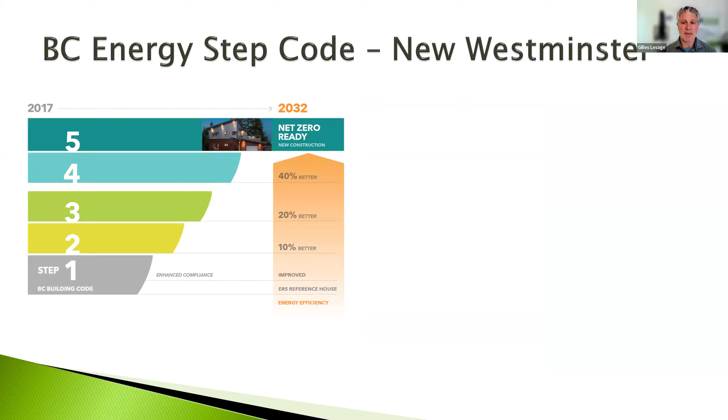So in regards to BC Energy Step Code and the upper steps, steps 4 and 5, that will be the focus of what we're talking about today. I'm sure all of you are very familiar with this already, seeing as New West is already at step 4 and step 5 with the varying levels of the carbon step code. That might be a bit of a newer concept too, but we were at EL1 for the longest time where it was just measure only, and now New West is voluntarily adopting higher levels of that, so step 5 with EL2 or step 4 with EL4.

And I understand that there's some talk about possible changes to step 5 and EL4 coming up possibly very soon.

So with that said, you're probably all very familiar with the basics of step code. I've got a few slides here to kind of talk about some of those things, but what I'd like to do is really look at some of the fundamentals of step code and how they affect and help us along to step 4 and step 5.

We also have the new carbon step code, with the idea that by 2030 we're at zero carbon performance or zero carbon ready, which would be EL4. So that too is something we'll discuss briefly. But a lot of this stuff, we have to understand that the energy advisor is basically the one figuring this out for you, to make your lives a little bit easier as part of your team. So we're really relying a lot on the energy advisors to come up with some of these numbers to show compliance.

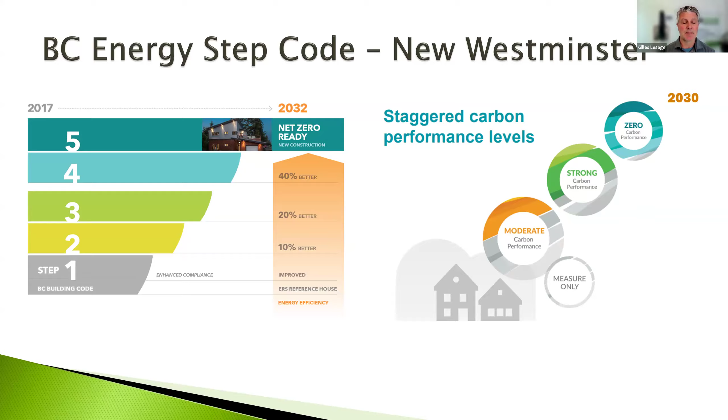So in regards to step code, we've got our basic metrics, I'm sure everyone is quite aware of. We've got the envelope targets, the mechanical targets, and the air tightness targets. And I'm talking just about the step code, not the carbon code at this point. We'll come back to that a little bit later.

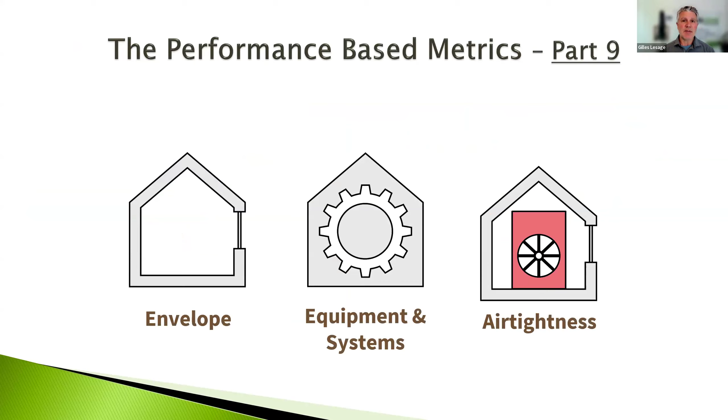We've got a few options here in BC. I don't know if some of you might be aware, but nationally they've got the tiered code, and it's very similar to our step code, but they don't use the TEDI or the MEUI as part of that. All they have is that percentage better than. So here in BC, we do have that extra kind of option for each, the mechanical and the envelope target.

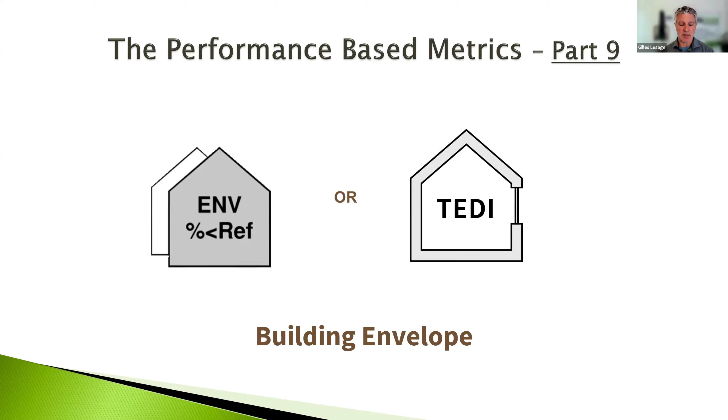So for envelope, we've got the percentage better than the base code reference house, if you will, and of course the TEDI, which is a performance-based metric according to the size of the home in regards to the heated floor area. And the TEDI, how it's calculated, is basically the energy that is needed to keep the home heated.

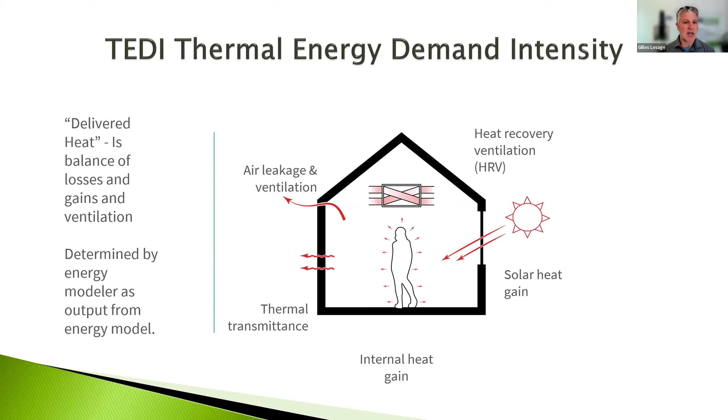Again, I won't spend too much time on some of these items here. And then they did make some adjustments fairly recently, as of May 1st of 2023, to allow for smaller homes to have a little bit of leeway, because we did find that there was a bit of challenges for smaller homes to achieve certain things. So there were some adjustments made.

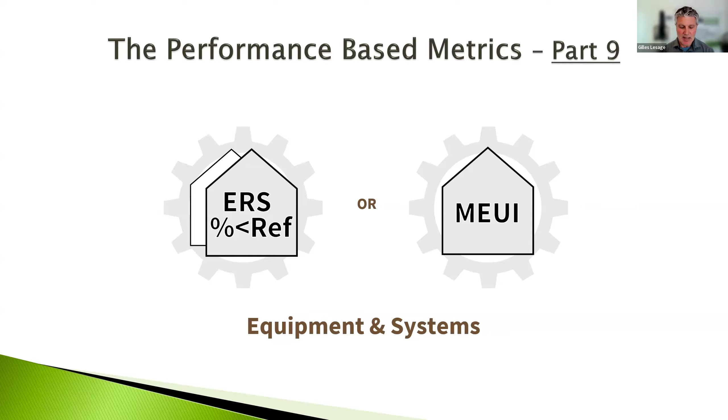All of this is in the tables, for your energy advisor, whoever, to manage and reference. Same thing with the mechanical target. We've got the percentage better than base reference house and/or the MEUI, which is that per square foot of heated floor space kind of metric. And again, it's either or for each of these.

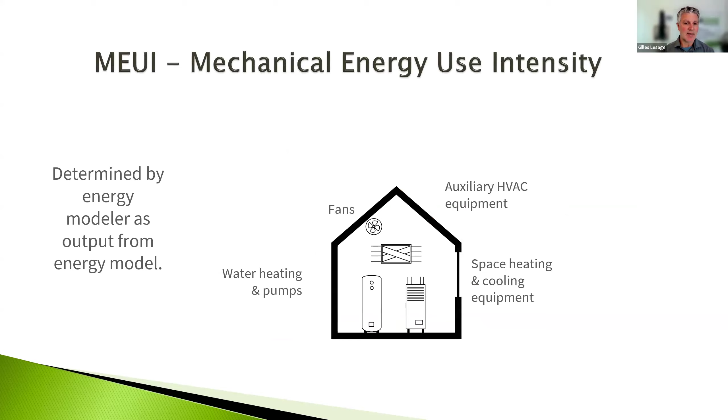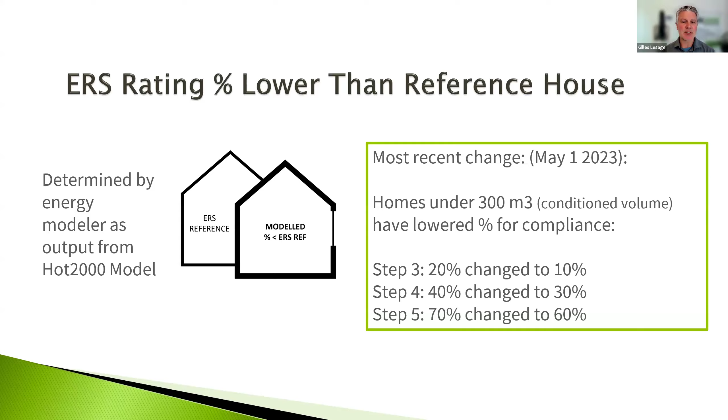And of course, the mechanical energy use intensity is, again, the energy needed to heat, cool, and ventilate your home. And that is compared or divided by the square footage of that heated floor area. Again, smaller homes were given a little bit of leeway here at the same time, because we are finding that the calculations didn't really favor smaller homes. So there were some adjustments made there.

Air tightness. This is obviously a huge factor. It's one of those metrics that is a pass or fail within our systems and our targets. It's becoming more and more prevalent, obviously, with step 4 and 5, because of the targets being more stringent for much tighter homes for those upper steps. So step 4 and 5 is 1.5 and 1.0 ACH. I'm sure you're all very well familiar with ACH and what that stands for.

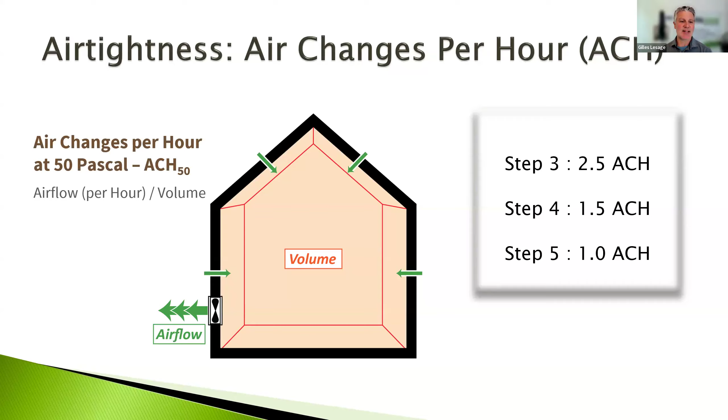The good thing is that one of the recent changes is that they did introduce equivalencies to the ACH, which were the normalized leakage area and the normalized leakage rates. And these are now published as part of that. So now we have ACH or NLA or NLR that we can use to meet these step code targets.

And why I say that's good news is that smaller homes and smaller volumes really did not translate well to ACH. And we were having trouble passing at some of the more normal targets, even for step 3 for laneway homes, for example. Vancouver had this in their VBBL for a long time, and it was like, why doesn't step code have this? So eventually it came through and became part of the changes as of May 1st of 2023.

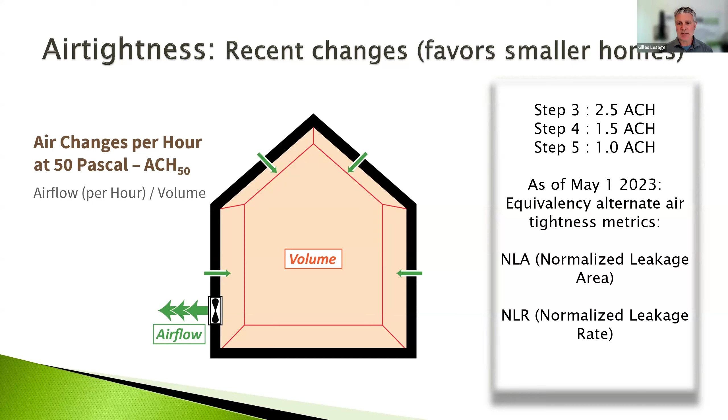So a few more options there, and of course everything is published. The NLA is basically, if you added up all the leakage of the entire home into one area, how large is that hole? Then it's divided by the surface area of the building, so it's normalized that way too. The same thing with the NLR, the leakage rate, which is the CFM or liters per second flowing at 50 Pascal divided by the surface area.

Again, all these things are for your energy advisor to test for and to gauge, and to use whatever metric works to reach these targets.

We will talk more about air tightness a little bit later on, but there are a few more design considerations first that we should look at when it comes to the TEDI, MEUI, and how that's calculated within the heated floor area, and some things that might help with that.

You may also be very well aware of this, but perhaps this might be a review for some of you. It could also be some new concepts that we're exploring here as well.

One of the larger things is the assemblies and fenestration performance, the shell of the building, and how that helps reach steps 4 and 5. Mechanical choice is obviously a huge part, and then air tightness again. So all equally as important to getting to that step 4 and 5.

I'm sure everyone here has the same kind of attitude: when we approach projects, we want to do what makes sense and apply the more feasible and practical ways of achieving step 4 and 5. So again, we have the luxury of having some of those choices.

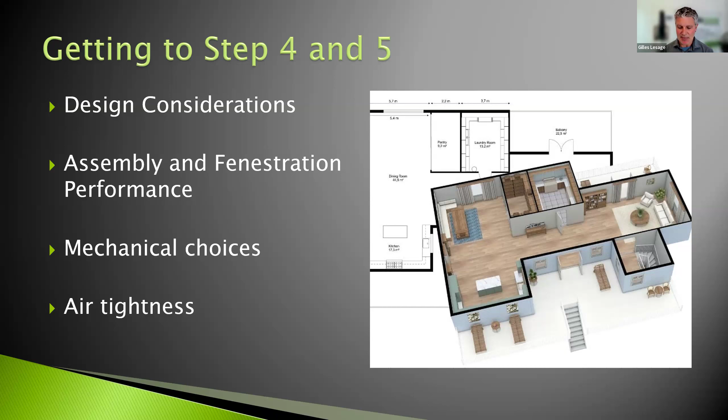So first, for design considerations, for the heated floor area - this is important for the TEDI and the MEUI because these targets are divided by the size of the home, the square footage or square meters, and that is from the heated floor area.

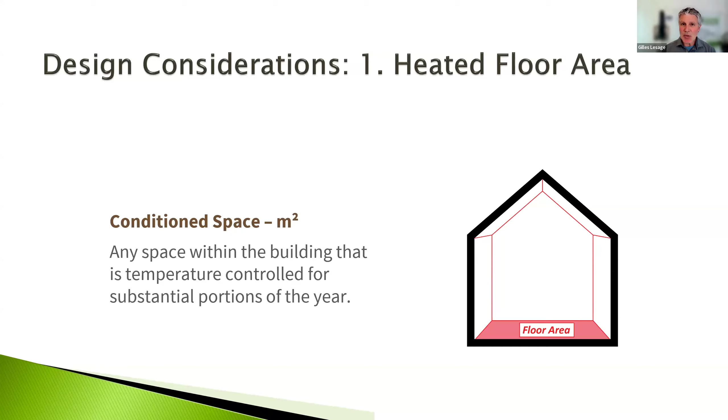So what that is exactly is any space within the building that is temperature controlled, a conditioned space, and it's also a usable part of the building, for lack of better words. It's the sum of the above grade floors and below grade floors that are at least 4 feet in height. That's what's included in the heated floor area.

Any kind of spaces like a mezzanine, for example, and open to below areas, these are not usable spaces. So typically the way you look at it is: can you walk on it, or can you walk comfortably in it? That's kind of the metaphor that I like to use.

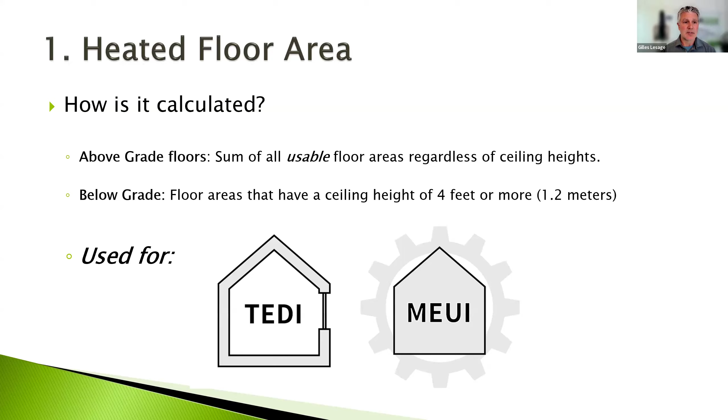It's used for the TEDI and the MEUI calculations only, not for the percentage-better-than calculations for those same targets. One thing that really affects the numbers are crawl spaces - we're looking for that 4-foot rule. Any kind of crawl space that is 4 feet or higher to the underside of the joist from the slab, that square foot or square meter area can be included in the calculations for the heated floor area.

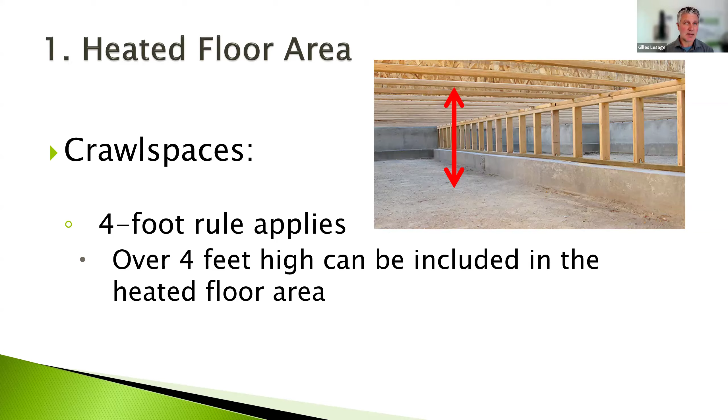So in essence, if you're looking at a 3.5-foot crawl space versus a 4-foot crawl space, that can make a big difference. Unfortunately it is a numbers game, and that does affect our calculations, but that's what we have. Just a 3-foot crawl space to 4-foot crawl space makes a huge difference in regards to calculating the TEDI and the MEUI.

And again, as mentioned, areas open to below are not included. So we're basically making calculations for TEDI and MEUI for an entire house, but we will not be able to use that floor area from that area. So that kind of hits our calculations a little bit.

So when it comes to design, I guess that's where I'm coming from with this. It would be great to keep some of this in mind. If you can, within the limitations of what we can do for design, if we have those options to avoid open areas to below as much as possible and to avoid 3-foot crawl spaces, that might help you in regards to the TEDI and MEUI calculations.

Number 2 in design considerations is windows. The amount of glass in a home really does affect things, I'm sure we're all aware of this. The amount of windows and where they're placed can have a huge effect on the project and how we're hitting our targets, both for percentage better than and the TEDI and MEUI.

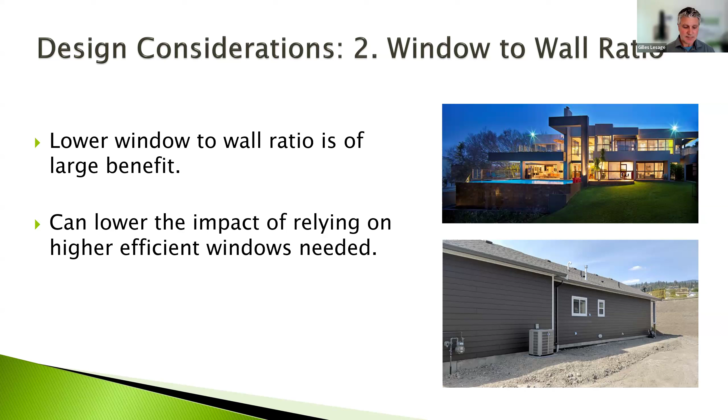When it comes to the window to wall ratio, we're always comparing to that base code minimum house, which we call the reference house. Within that reference house we'll always have a window to wall ratio between 17 and 22%. So if your proposed house, your project, the as-built or what have you, has a 15% window to wall ratio, you're at an advantage because it will compare that proposed house with a reference house of 17%. So the numbers are in your favor.

Again, if we have a house like in the top right here, where we might have a 35 to 45% window to wall ratio, and we've had lots of those here in the Okanagan, I can tell you, that house will be compared to a home with a 22% window to wall ratio. So it really will have to work a lot harder somewhere else to get there, or we have to go with really good window performance, and maybe wall performance, et cetera.

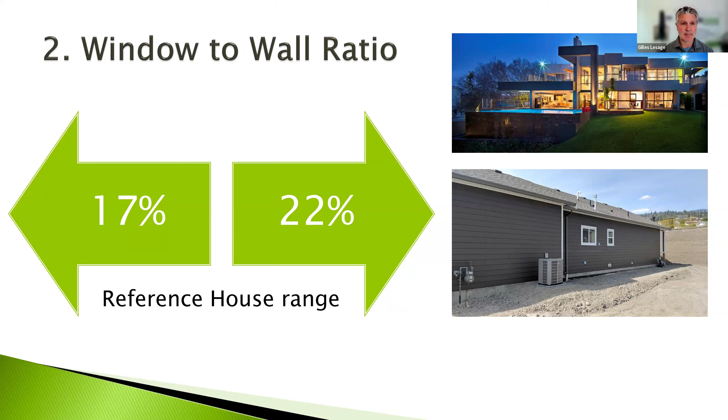There's other things with windows that come into play. There's a lot of technology involved. We have to deal with solar heat gain coefficients. We have a lot of overheating concerns these days happening in BC, so solar heat gain is key for this.

Also, depending where the windows are placed, the orientation does help or will affect the numbers. U-values, the actual thermal resistance of that window, are huge. Do we go triple or dual glaze? We've got all these decisions to make, so again, use your consultants, your energy advisor, energy modeler, to help you with window performance.

Even with window selections, we find many times that we're given kind of a blank slate. You tell me what windows we need, and even the performance criteria for them, to make sure that we have a safe home, a good performing home that is getting to the targets we're looking at.

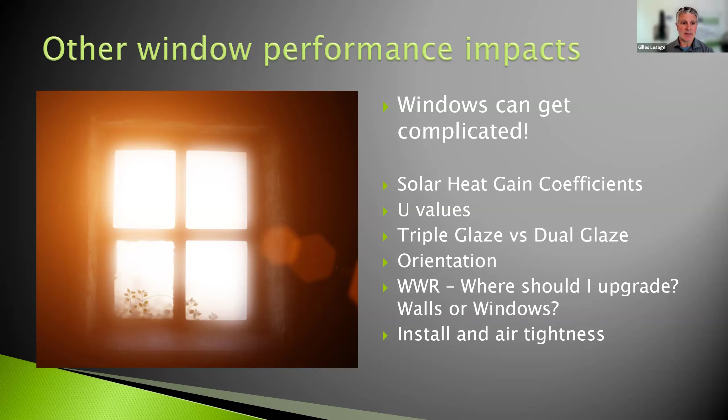And of course, the installation of windows, which leads to air tightness and any other possible unintended consequences of a poorly installed window. We've probably been exposed to some of those things in other seminars and so on. There's a lot of information out there about window installation, some great guides, so we'd invite you all to further look at those and explore.

So dual pane or triple pane, that's always a question. We're looking at step 4, step 5, and we still do have, for the most part, that choice. For step 5, we're probably needing a little bit more help. But what I wanted to show with this slide is that we have a bit of overlap. Dual glazing units are being manufactured now with some decent numbers in regards to U values, where we see that they're kind of overlapping with triple pane values. Every manufacturer has great windows, and every manufacturer has a range of windows and coatings, and where the coatings go.

So it's a matter of exploring with your suppliers what works. There's so many options out there. With dual glaze, they might cost a little bit less. The workability, where they're a bit lighter to install, easier to install, that's been the conversation for a while. It's readily available, obviously a more common thing.

Triple pane is obviously available, but might have a little bit of a cost increment. There's some myths out there that it's just way too expensive to go triple pane. Really, from some of the invoices I've seen, I'm not a builder paying the bills, but it's surprising how many show just a little bit of cost increase, not as much as I would have thought. So it's worth exploring, is what I'm saying.

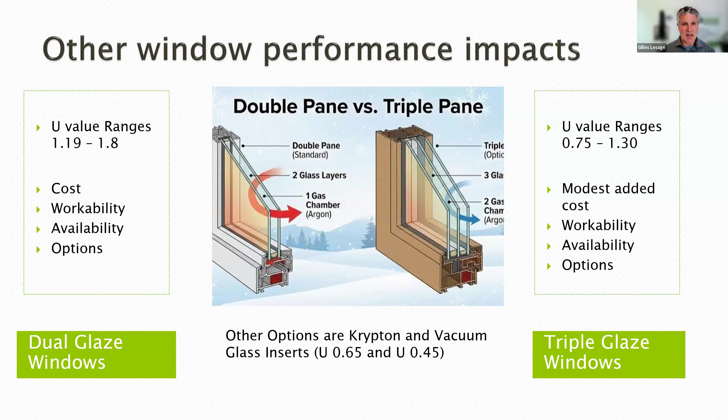I got my first project here in Kelowna. I'm excited, it has some vacuum glass inserts. We'll see how that works, but they can range really low U values, from Krypton fill at 0.65 to vacuum VGI at 0.45 U values. So there's a lot of stuff out there. Obviously a bit more cost to these extreme high performance windows.

Design consideration number 3 is keeping it simple. I'm sure you've all seen this slide before. I like this image, it really does dictate what the idea is. What we're looking at is the simpler the design, the easier it would be to basically get to some of the targets in regards to exposed surface to volume ratios. That formula does hit when it comes to some of our metrics.

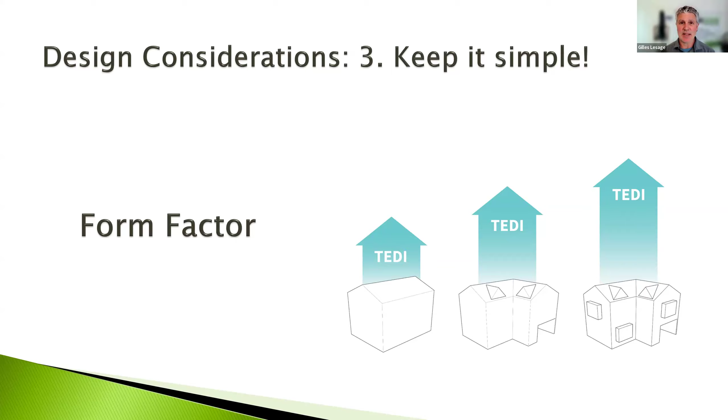Also, when we keep the shape easier, it's a lot simpler. We have less intersections, corners, nooks and crannies, if you will, to figure out how we're going to air seal this envelope, and just construction practices altogether with labor and such. It just makes it more complicated. And of course, the more complicated it might be, the more mistakes or more corners can be forgotten, so on and so forth. So keeping it simple, if you can.

We're all limited with some of the design features that we're trying to deliver to our clients for custom homes, obviously. Our clients are looking for specific things, and we have to deliver. But there's the notion of, is there a way that we can build a simpler form or simpler shape and add architectural details onto that to make it look a bit more intricate, or not complicated, but just a bit more fancy, if you will. So there's that concept as well.

So we're kind of in that tug of war to say, listen, we like to keep things a little simpler, but we also have to design for what the aesthetic is that our clients want. So as much as we can, that'd be great. Simpler shapes - a more complicated shape would be a lot more difficult to air seal, to provide airtightness details, for example, depending on our approach there.

The time it takes for construction, making sure that our labor and our trades are actually setting it up properly and constructing it properly, that's one other thing. Also, the size of the home - size does matter. Smaller homes and simpler homes tend to perform easier and hit higher targets a little bit easier than more intricate or more complicated designs.

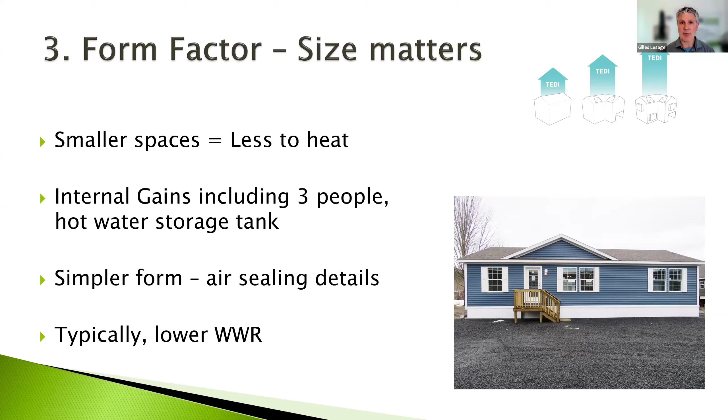Simpler form, simpler air sealing details, and also with a smaller home, typically, not all the time, but typically it comes with less windows. So your window to wall ratio - I've seen some manufactured homes that are down to like 7% window to wall ratio. So anyways, just some things to keep in mind if we're dealing with smaller homes, even laneway homes, for example.

Design consideration number 4, R values and assemblies. Obviously a huge part of our shell, if there's any ways we could improve on that R value, it's going to help us for those higher steps. There's things we can do with attics, with walls. I'm sure we've all been exposed to wall webinars and high performance walls. There's a lot of literature and illustrated guides out there, really good ones, and we've been having wall discussions for many years since Step Code came through. So lots of options there, and of course our foundation walls as well.

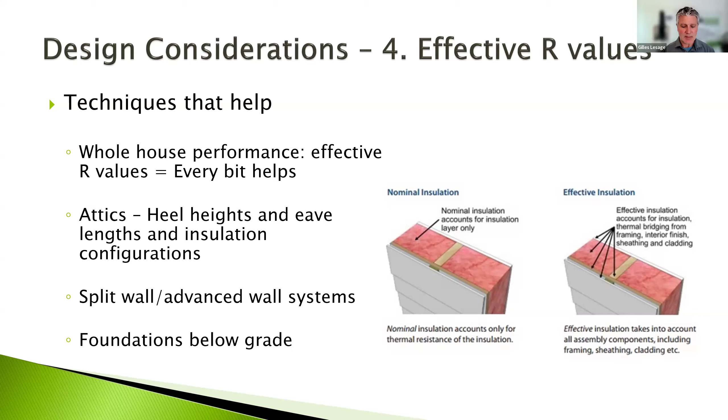For attics, if it's a regular kind of ceiling, one thing that's super easy is to pump in more insulation into an attic. It's probably one of the least expensive, and most effective, kind of upgrade to do.

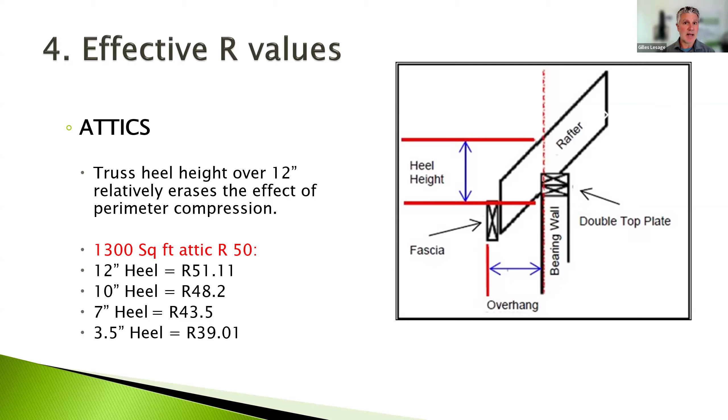One thing to keep in mind when it comes to design is our heel heights. For the most part, I think I've only been seeing high heel trusses - we've really caught on in the industry toward that. But keep in mind that in the energy modeling, if we have a lower heel height where it comes down to a point and compresses some of that insulation, it does affect the overall R value of that ceiling. So keeping a heel height of 12 inches or higher is a huge advantage - it gives you the full benefit of the R value for your ceiling within the energy model.

For flat roofs and flat roof decks, we have some options here. We're seeing a lot more exterior roof deck insulation - I don't know if some of the builders here have been using this more than cavity fill or spray foam. We can discuss that later, but basically we can look at the concepts of an exterior wall that's been flipped on its side and is now a roof. So we can have split insulation, just exterior roof deck insulation. We also can't forget we have a sloped roof package usually made with EPS foam, so there are ways to include the R value of that EPS foam sloped roof package within the assembly - it's not just a simple averaging. There are actually guides in the BC Housing Illustrated Guides that show how to do that properly.

So again, lots of options here with flat roofs, and we're seeing more and more flat roofs, especially with decks over living space. There's also a way to possibly split that, where you can actually have cavity fill insulation plus a little bit on the outside. But again, it's good to gauge that just like you would with a wall, to make sure there's no chance of any dew point condensation forming on any sheathing layers as we get toward the exterior.

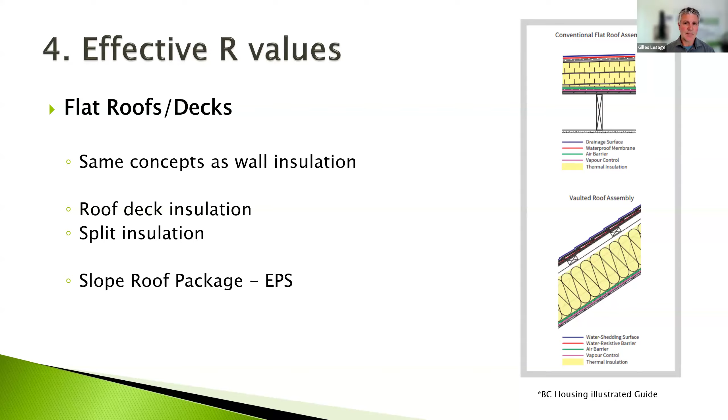Cathedral roofs, same thing - there's also some ventilation requirements depending on the configuration. Of course these are mostly filled from within, but we have seen cathedral roofs that have exterior deck insulation as well. So again, lots of options there, to be explored by or offered up by your energy advisor or energy modeler to see what best fits the project.

Exterior walls, same thing - I'm sure you've had a lot of exposure to some of the options out there. I guess the story is that we will need higher R values on our walls and ceilings everywhere to get to Step 5, for example. For Step 4, we can still get away with some conventional construction techniques as done today, but for Step 5, typically we're looking at added R value.

When we're adding that R value to the exterior, that's mostly the conversation we're having today with building science and a lot of our high performance wall systems. Thermal bridging is almost eliminated by adding insulation to the exterior, which helps with the calculations but also helps with any dew point locations within that wall system. We'd also have to think about drying potential as well. There's a lot of options out there - we've all heard of the double vapor barrier, the vapor sandwich. At the most fundamental level, that's something we obviously have to keep in mind and avoid.

There are different materials out there that can create that, but there are some materials that can still be used, even though it's depending on thickness and depending on membranes, like smart vapor barriers, for example. We have all these tools available for us to design a safe wall. Again, can't understate how much it's important to make sure your wall is built safely, and there's a lot of options for that.

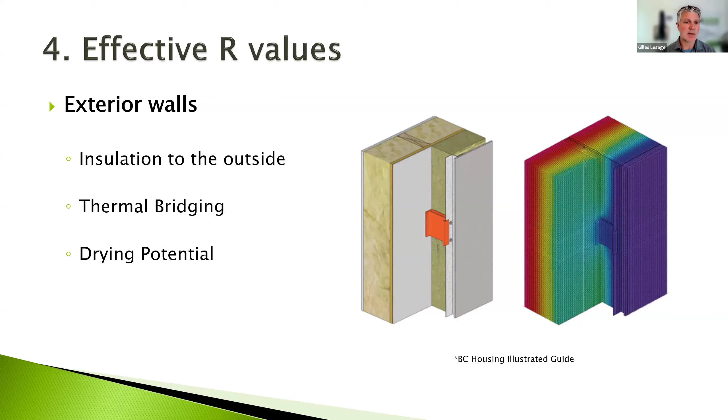I've got here a few images from the BC Housing Illustrated Guide. They've got their R22 Plus guide, which is great, with a lot of options inside there. It does have a lot of building science built into it too, so I strongly recommend just going on their website and seeing what's out there. They've got the air tightness guides and a lot of resources available. And they're not the only ones—RDH has a ton of resources too. There really is no shortage of information on wall assemblies or any assemblies out there.

We talk about permeance too. When it comes to the building science of the wall, we obviously want to avoid any kind of unintended consequences. Make sure that the drying potential is there, and have your wall assembly verified and designed.

We've got some building envelope consultants out there that would be able to help. Energy advisors, for the most part, have to stay within our lane of expertise. It's good to ask your energy modeler or energy advisor what they think, but they should be smart enough to also say, listen, this is beyond the scope, I suggest we have this further looked at to make sure we've got a safe system here. So you can have those conversations with them to make sure everyone is on the same page.

Flashing detail—yes, it's kind of a byproduct that might be needing more effort when we come to more advanced, high performance wall systems. I've talked to some builders here in Kelowna trying out different walls, and one of their biggest stumbling blocks is proper flashing detail, the cost of the flashing, and getting their trades used to doing it properly. So yes, that could be a bit of a growing pain when it comes to using more high performance techniques in your wall systems. But once it's learned, once it's done, we should all be better for it in the end.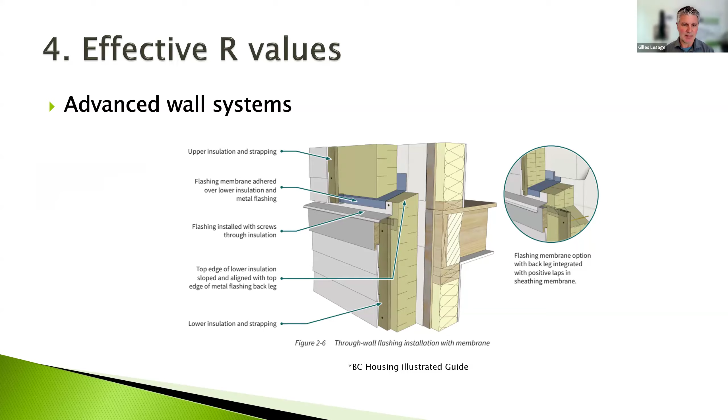So there's always a learning opportunity to be had when we're looking at high performance building, and that goes for every area.

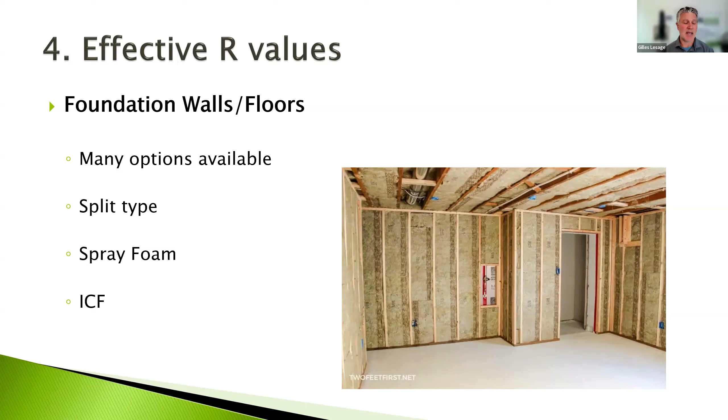Foundation walls, same thing—we've got a lot of options here. There's ICF, there's concrete, there's framing on the inside. Where do you put your foam insulation if you have some, and so forth, so lots of options available. Spray foam is also widely used in some applications we've seen. I know a lot of areas have their construction preferences—I see a lot in the Lower Mainland, the Okanagan, some in the Fraser Valley, and there's some nuances there in what people are actually doing or using and what some jurisdictions prefer to see in some cases.

ICF—ICF is something that when you talk to builders, from previous conversations, it seems like, oh, if we build with ICF, we're going to be just fine. But we have to look at the effective R values. For example, a typical ICF with a 2 5/8 inch thickness of EPS on each side gives us an effective R value of approximately R22, give or take, depending on the brand.

ICF does come in different thicknesses as well—we've got 3-inch and even up to 4 inches of foam, and it might come in different materials like GPS, graphite polystyrene, versus EPS. Some of those are on the market, so we get an R28 plus. But for an R22 basement, that can also be achieved conventionally with concrete, a layer of foam, some framing and some batt, and you might achieve the same or even a little higher than R22 depending on what you're doing. So the sky's the limit in regards to that as well.

I'm just saying that the R values, effective R values of ICF can easily be replicated or the same as other techniques using concrete as well. It all depends on your preference and of course on choice. Full ICF homes obviously can be quite airtight, giving us a really good head start to being airtight. So there's pros and cons everywhere.

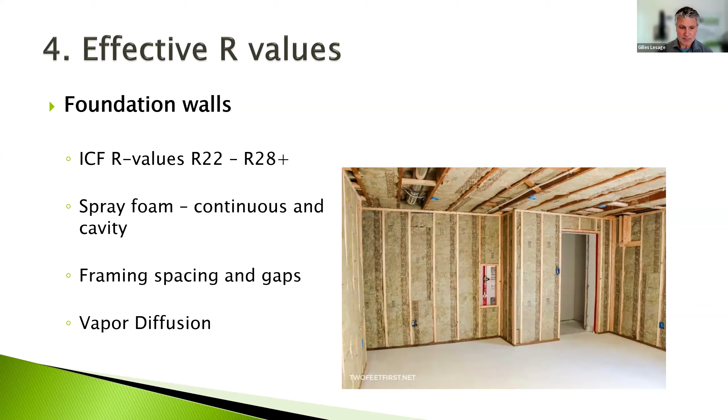For foundations for pony walls, we have a lot of options there as well. One opportunity that you might have is, instead of stepping down with your foundation, you can actually frame all the way up with your inside framing as well. And like in this photograph, it allows you a double layer, so you can insulate both layers instead of having a shelf traditionally like we would see in older construction in your step down basement. So again, just a trick there you can add, and that would add to our effective R value of the entire project.

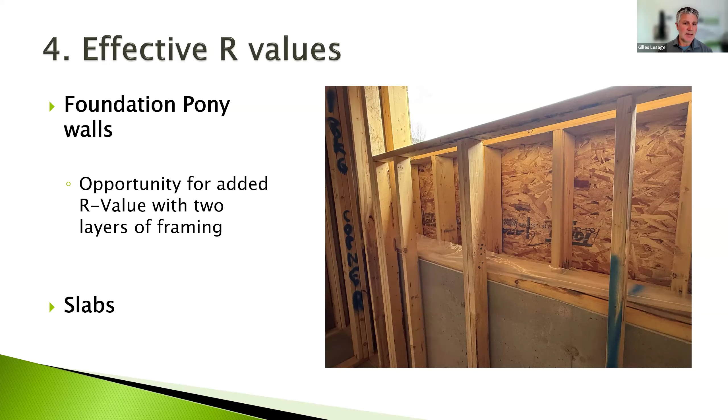Slabs, again, under slab insulation, depending if it's needed or not. It fits projects, sometimes it's not needed, depending on if you want it for comfort. If they're in-floor heat, obviously, that's a no-brainer, for example, for any kind of basement slabs.

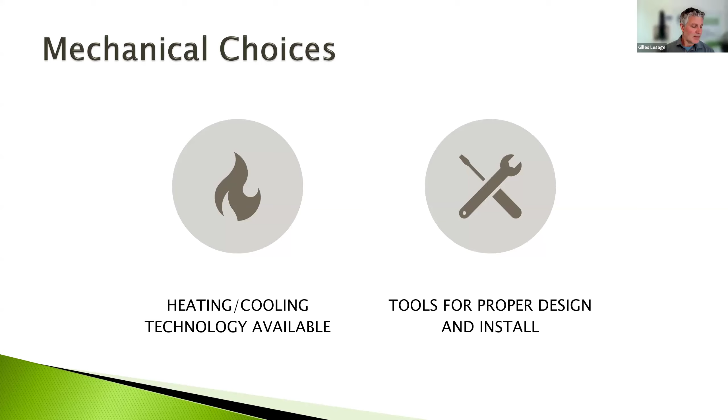So when it comes to steps 4 and 5, it's pretty safe to say that heat pump technology is necessary, is needed. And that comes for heating and cooling as well as hot water. We're seeing lots of technologies emerge onto the market. We've got stuff like phase change for hot water that's starting to make its way in. So there's no shortage of new technology, but things that will work to get us to our targets. Some of it has to be proven yet, or it hasn't been on the market that long, or it's still being tested and so on and so forth.

We've also got our ventilation efficiencies that will help us too, and we also should be considering the cooling requirements. As you may know, and I'm sure in New West, cooling is probably included automatically. In some cases where it wasn't much needed, we have cooling requirements now by code for life safety reasons that at least one room has to remain at 26 degrees. So something else to consider with your design and with your conversations with HVAC and your energy advisors and modelers.

Choices and considerations for mechanicals: we've got full electric systems. There are dual fuel systems where you have an air source heat pump with a gas furnace, or a hot water coil to heat with an air source heat pump. And of course, combination systems for radiant systems. We have air-to-air systems, air-to-water heat pumps. Lots of stuff on the market.

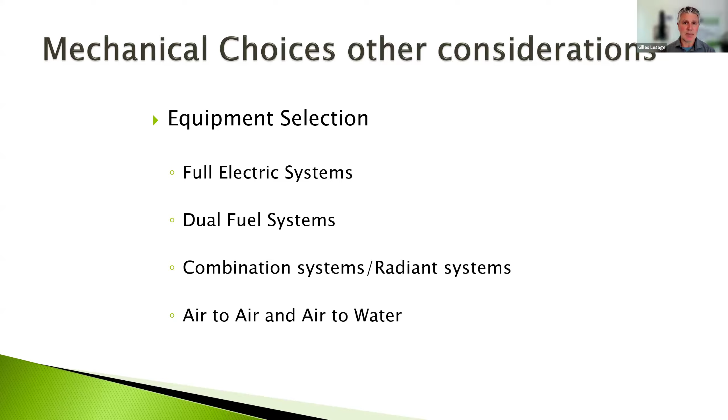Heat pumps are key to these upper steps. There are systems out there that take less space in your mechanical room and fewer appliances—we don't need two systems to do one job each, one can do both, perhaps. There are just so many options out there. Have that conversation with your HVAC designer, installer, and energy advisor, and ask the right questions. There's a varying degree of willingness to explore new technologies from HVAC contractors, one to one, so asking the right questions will get you to the right combination for your project.

Again, to stress it enough, it's best to plan it right and do it right the first time—proper mechanical install, sizing, installation, and then verification of performance. It's key. Why put something in, assume it's working, and then it's just off by 10%? We've just spent all that extra energy and time, and possibly caused premature wear on that system. These are high performance systems—when they're installed well and properly commissioned, things should be smooth. But if they're not, there's probably more chance of something going wrong in the future that will be a bit of a head scratcher.

Right sizing with F280 room-by-room heat loss should be a no-brainer—it's actually required by code, though some ask more for it than others. So again, ask the questions, ask for this report. You can look at it and familiarize yourself with it to see what it means, and get that relay of information from trade to builder to installer, just to have everyone in that conversation and make sure we're installing it properly. And then verification, proper commissioning after the fact.

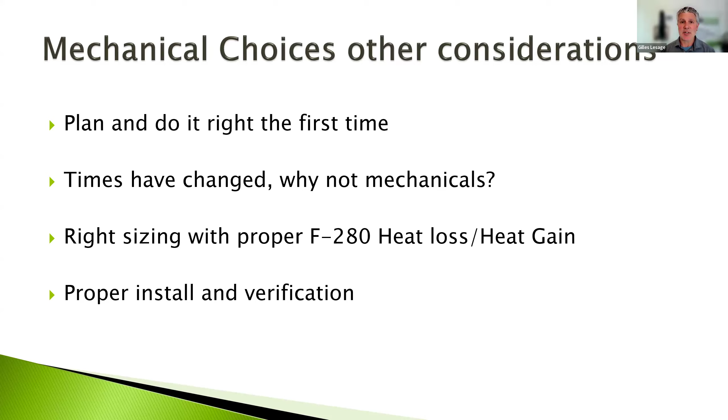Air tightness—probably one of the biggest jumps, I guess. We're looking at step 5, aiming for 1 ACH, 1 air change per hour, which is a really, really good number. It's absolutely doable, even with conventional practice. I like to think of it as: let's use our air barrier, let's do it properly.

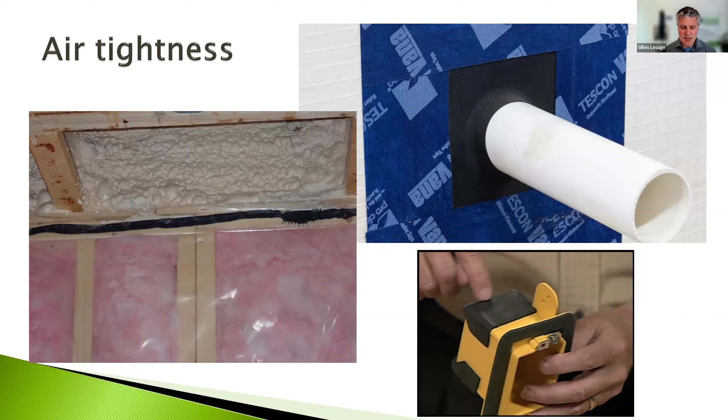I know there are contractors out there that can seal homes, such as AeroBarrier, for example. They are out there, but this is where we should be headed—seeing how we can seal our homes organically, without needing that extra step for costs and such. It's also just good practice. There are a lot of small, detailed areas that do add up.

These are just little gaps in window corners, very simple to seal. I'm sure many on the call already have advanced air tightness techniques—just a couple of tips and tricks we see in the field that we bring on and show builders, and from there they learn, they do it, and now they do that from now on. It's just a matter of keeping that practice going. Small areas, they do add up.

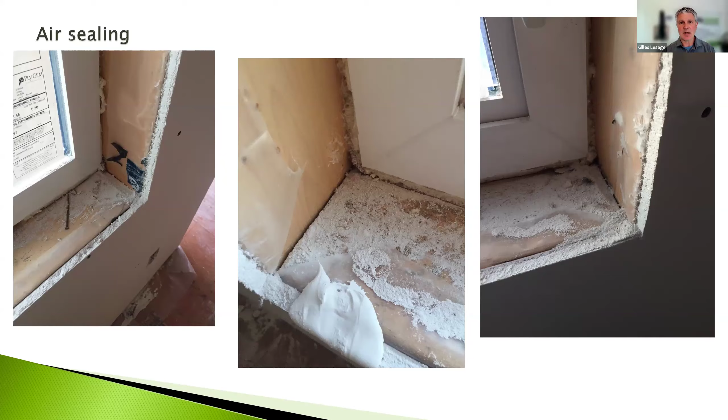There's gaps, there's hidden gaps. The installation of spray foam can be tricky. We see it all the time. We do mid-construction thermal imaging on full spray foam homes and find little gaps here and there. Stacked framing, like we see on the right, if we don't seal those joints, that's a possible area for air to come in. Small stuff, like a gap above the rim joist, or little gaps in framing at ceiling levels with stacked studs. Those gaps are vulnerable. If you have 100 of those in a home, it can add up.

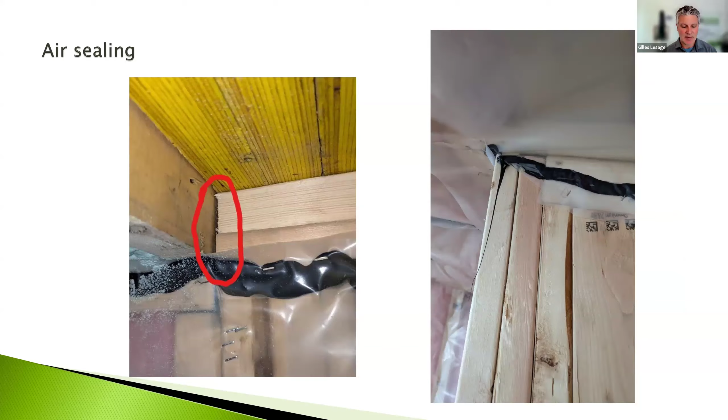So the best thing to do is actually have your energy advisor come in for a mid-construction blower door test. There's a lot of aha moments during these tests, and hopefully they help educate you and you can take that further. The exterior air barrier as well.

If you haven't tried this yet, I'd strongly suggest it. It's very easy and so effective. It's a matter of connecting the outside, for example your house wrap, to your foundation, interconnecting with your attic, however that configuration is, taping the joints, and good EPDM seals at your penetrations. It's quite easy to do.

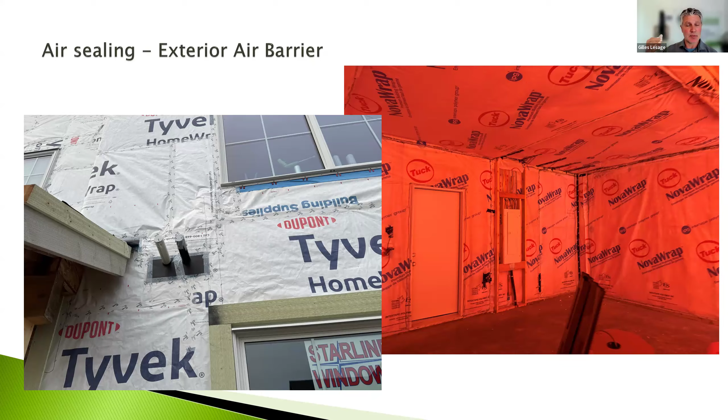And if you do this in conjunction with interior poly, we've seen huge success rates. The picture on the right is the inside of a garage of a townhome. They've actually used the house wrap on the inside, so that exterior air barrier concept was brought into the garage for the exposed floor and the shared wall with the home.

Townhomes can be very tricky for air sealing. These areas of the party walls are one of the most vulnerable ones. Areas like this, if there's a parapet type wall for example, there's the talk of compartmentalization - are we sealing the walls between townhomes or units?

It's great for smells, great for sounds, great for air tightness altogether, but that also needs really good detail. So again, speak with your energy advisor, your building consultant, your building envelope consultant, for example. Just get those proper details hashed out, even just drawn out, whether on a napkin or on house plans - have a plan for that air tightness.

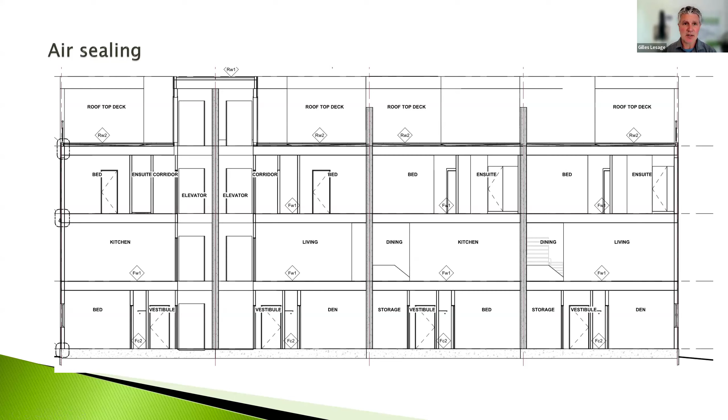And there's a lot of things that a mid-construction test will show you, especially in townhomes, that can be used - a garage, entry-level garage into a furnace room to the townhome above, it gets tricky. So it's just a matter of gauging it, seeing where those problem areas might be, and taking that forward.

So again, air sealing is pretty fundamental. You just got to pay attention to smaller details. Think as air - can air get through from outside to inside as you're looking at an assembly? A red line on your actual plans - if you can draw a red line around your elevation or cross section, that should do the trick. It's thinking in that way. It's a continuous system involving many other materials. It's not just poly and spray foam and outside air barrier - it's wood, it's windows, it's glass, it's vinyl along windows. It's many other components that work together.

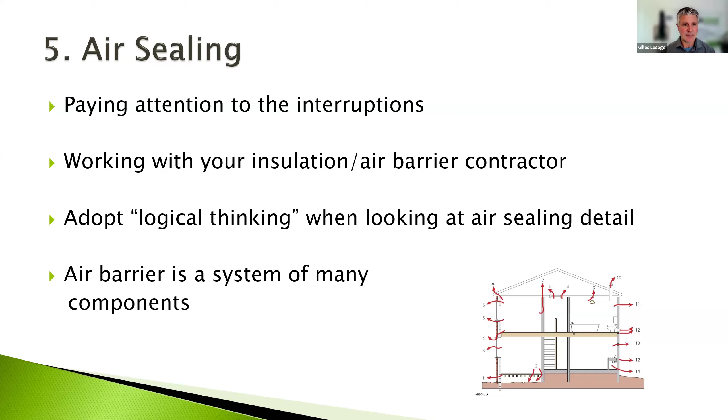Again, mid-construction can reveal lots of stuff, and it's also a good educational experience for you to be on site and see where things are at, and take that forward.

Now, I'm looking at the time here. How much time do I have, Ryan? I'm not sure. Is it 10 more minutes, Sue? Is it? Yeah, okay. On the agenda, I think - is that right? Sounds good. And including questions? There's a couple questions, so we'll make it work. Don't worry, you're good.

Awesome. So we'll go from step code steps 4 and 5 to the zero carbon step code. Again, since March 10th, 2025, it got introduced and we were at the measure only - well, it got introduced in May 2023, but we were actually doing the measure only as of March 10th, 2025.

The measure only just meaning it's supposed to be some kind of an awareness step to show you this house is at EL2, for example, or EL1. So measure only should have been meant to show, not 'oh, you're at EL1, you're great,' but actually, 'no, you're at EL3 as it stands right now.' But it just wasn't needed at that level yet. Obviously, like New West has done, they've voluntarily adopted higher levels of the carbon step code, which is great - step 5 with EL2 and step 4 with EL4.

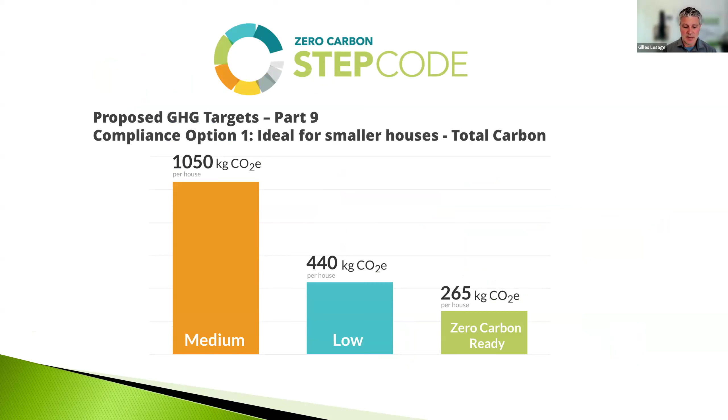These are just a bit more of the targets here, but again, the energy advisor or energy modeler would be calculating this on your behalf to make sure that we're on track. It does look at operational carbon at this moment, so that's the carbon, the emissions from operating the home. Nothing about what's in the products to manufacture them.

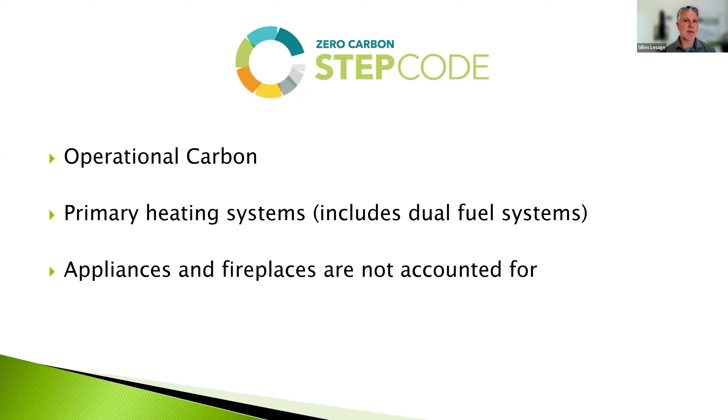It does include basically the primary heating systems and hot water systems, including the backup systems to a heat pump, for example, if it was a dual fuel. One thing it does not include is your appliances and fireplaces, because these are considered luxury items, not primary heating systems. That's a question we get quite often.

So again, what it comes down to for steps 4 and 5, for EL4, we're basically looking at heat pump technology. I'm bringing back the slide from the mechanical section just to say we're back to heat pumps. When it comes to hot water systems, we're definitely with an electrically based system for EL4.

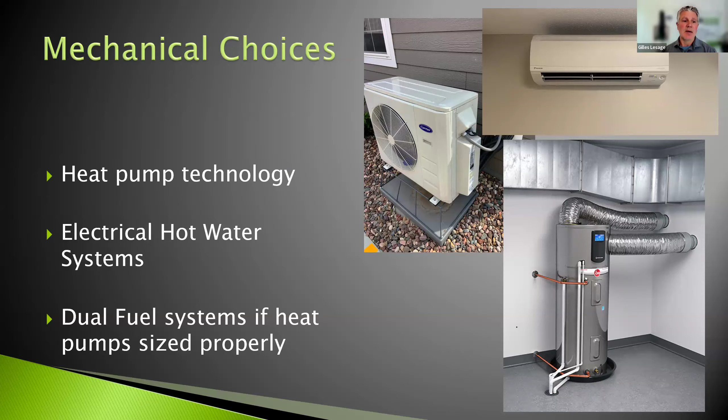We've got a lot of modeling that we've been doing to prove what level we're at. We've seen a lot of projects with a dual fuel heating system with electric hot water that can still hit EL4. Absolutely, if it's full electric, even better, obviously.

It all depends too. A properly sized heating system will be absolutely needed, because the backup heating system should only be there as a backup, as fully necessary. So your heat pump has to be properly sized for this to work properly. Again, emphasis on that first initial design.

So Gilles, before you jump off, can I ask you a quick question on the dual fuel and what you're seeing in the industry? Are you finding with new construction projects, what are you seeing in terms of system sizing, like the gas furnace with the heat pump, and in terms of control configuration? What type of switchover are HVAC contractors programming into the thermostat ahead of occupancy?

That's a good question. Even that switchover temperature does vary quite a bit. We've got a lot of keener HVAC contractors here in town. We can see anything from -5 to even a little bit lower than that for sure. Even the cold climate stuff can be a little bit more. It all depends on whether it's a matched system and if it's properly done with proper controls. That's just a huge thing.

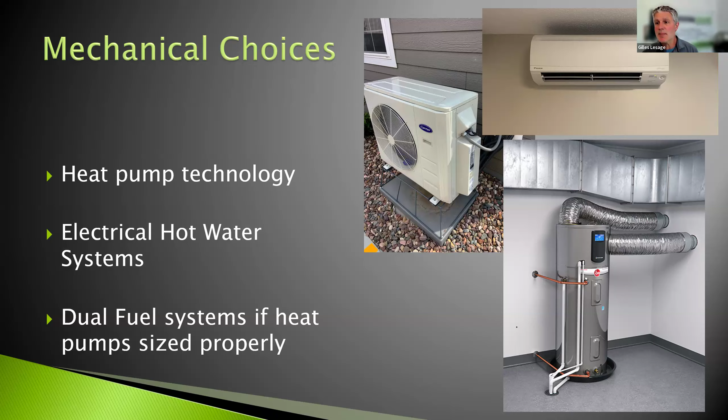So in regards to the carbon step code, we're not quite there yet, but the concept of embodied carbon, which is the amount of emissions taken to create, manufacture and transport products to build your home, that's not in our carbon step code. It is already a topic of conversation at the national level, and it is slowly making its way possibly towards our regulations, but right now it's just being considered.

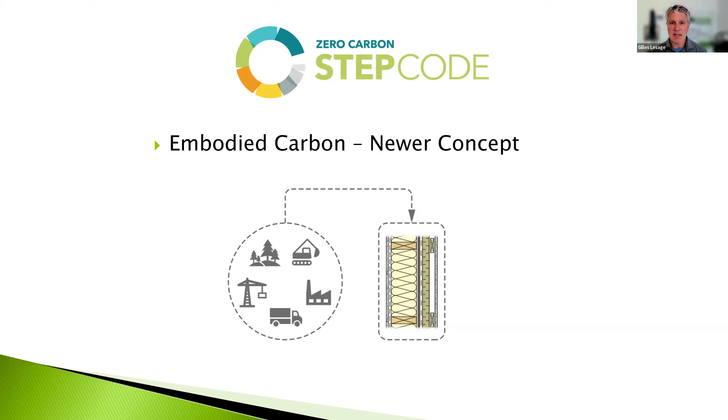So if you haven't heard about embodied carbon in the past, it's something that your energy advisor and modeler can calculate for you on the entire project. It helps you make decisions on materials to help lessen that amount of emissions. That's the emissions that went into the build before you even open the door and turn on the heating system. And that's a big chunk, and then the operational comes after the fact. So they do interplay, and we are talking a lot more about it.

A few case study examples before I go on.

Step four already. We've got a townhome project. This is in climate zone 4, in Chilliwack, and they use the exterior air barrier system. Step 4, EL4, just to show you what was in this, and I'm just trying to see what it would take to go to step 5.

They already had an ACH of 1.3 for the whole building. We did guarded testing, 3 fans at once, whole building with 3 fans. They had a cold climate heat pump with a gas furnace, dual fuel, electric storage tank. They did not have HRVs in here. They had the interconnected systems for their ventilation, a basic R22 wall, R60 attic, R28, no under slab insulation, but they already had decent windows at triple pane.

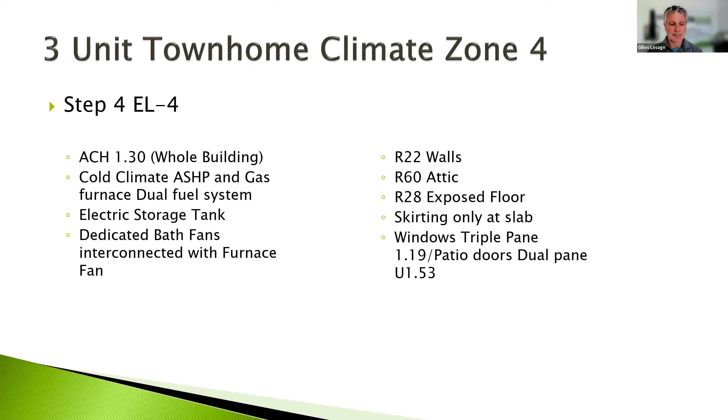This came in at step 4 already, and EL4, even with the gas furnace as a backup, because the cold climate heat pump was actually a certified, properly sized system for the building. And the air tightness, they did use an exterior air barrier for that.

To get to step 5 for this and still EL4, obviously the air tightness would have to be better. The only other upgrades needed would be an electric hybrid heat pump water system, an HRV system. We'd have to go and improve the walls to R24 plus an inch of mineral wool on the outside, and going under slab insulation. Actually, that one there, we could have gone with or without, depending on comfort - we had a little bit of wiggle room with the numbers. And then just making sure that the patio doors had the same kind of U values as the rest of the house. So that was just one example of some of the upgrades needed to get to that step 5.

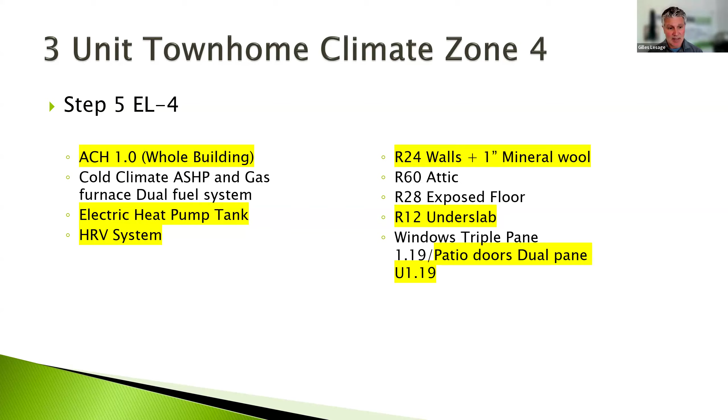And step 4 to 5 is quite the leap. I know we were talking about this with Ryan - it's not just a step, it's a bit of a leap. So just to show that, there's different combinations of things that we can do that make sense for the most part. And that's having your EA and you having that discussion, to see what your preferences are on that too.

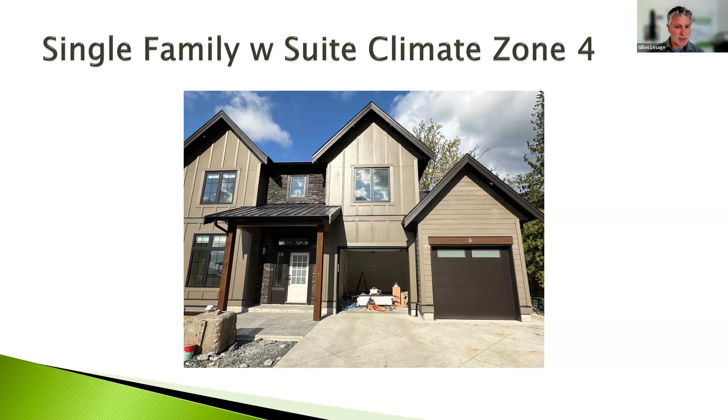Again, another one, single family with a suite, climate zone 4 too. Again, this one's in Chilliwack, one of our clients there. Already good air tightness at 1.17, air source heat pump with gas furnace, electric storage tank. Again, no HRV, R22 walls, so nothing spectacular there. R50 attics, R20 flat roof. They had perimeter under slab for the slab areas, and they had triple pane windows. And their basement was a pretty basic basement.

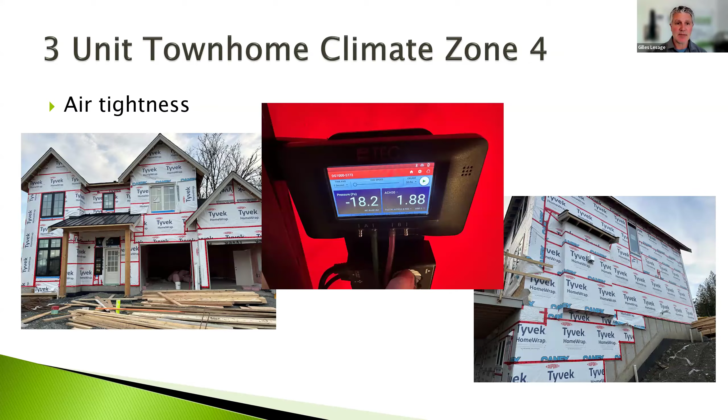Again, here's the mid-construction sealed exterior air barrier. Their air tightness at mid-construction was 1.88, which we consider on track - pretty good to be below 1.5 - and they wound up at 1.17. So this one for step 5, obviously air change rate of 1, upgrade to an HRV. The walls have to be upgraded, and the attic slightly, and full under slab insulation. And that's what got us to step 5 on this one.

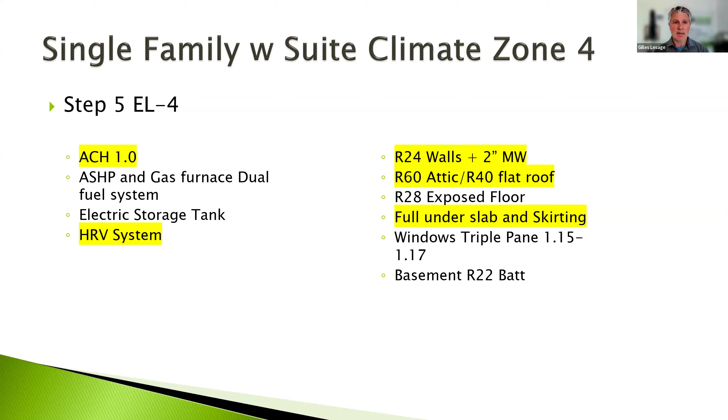So again, we were able to keep the electric storage tank in this one, not go to a hybrid heat pump water heater, if we wanted to choose that, depending on costs and whatever the preference was for the build. So again, different options that your energy advisor can help you with.

With that, the EA, your energy advisor, energy modeler - we are really becoming a bit of the connector of the dots. We're in the middle of a lot of decisions that can be made within that. So work with them, ask them the questions. Their skill set is varied and their skill set is always expanding. Like say, we could help with mechanical heat loss, heat gains. If the mechanical contractor's not doing it, we can do it with our energy model, which makes it a bit more precise in a way, instead of using somewhat defaults.

We'd like to come in at planning stage, design stage, where we could make decisions early. With that said, it's all about the integrated design process. If we implement that where everyone's having that conversation earlier on, we can make decisions at a time where it might not cost as much. We don't have to redo work.

We don't have to take 2 steps back to do 1 step forward again. So having that conversation is something that we're really trying to incorporate as common practice with partnering building, because it's not done a lot. There's rebates out there from Fortis for the IDP process to be implemented. Again, it's just a matter of designing first and building later, not building and then designing as you go.

And then also the mindset for IDP is having a collaborative mindset between everyone, trades, everything. We're not just thinking in silos where, this is my job, I'm going to do my job and leave the site, and then someone comes in after and does their job and leaves the site, affecting other people's work and punching holes through the walls.

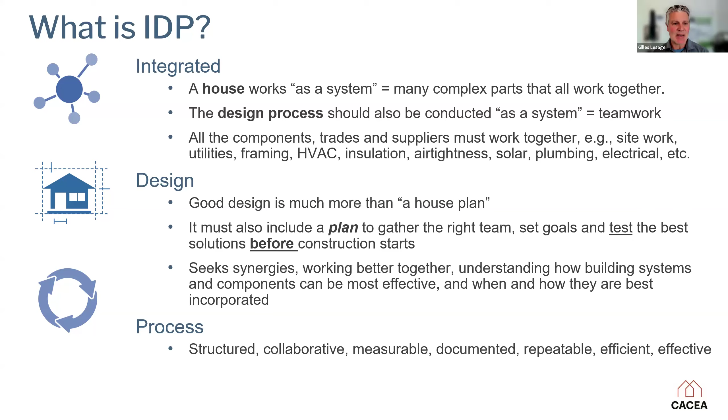These are all just sayings, but it can happen. So again, IDP, if you're using it, great. There's different levels of IDP out there, from full-fledged structured ones with a full day room full of everyone, to having coffee with your clients and getting that information on smaller, not so frequent builds, for example.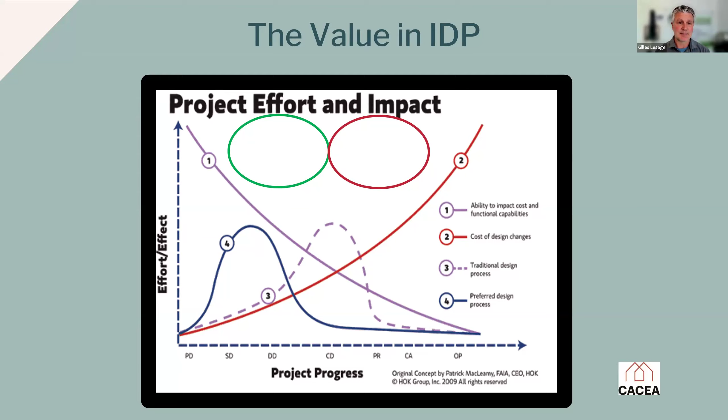Oh, a lot of animations here. Sorry, I wasn't aware of that.

There can be some challenges. Not every trade is readily available to take part in these meetings. So you as a builder, if we've got steps 4 and 5 that we're after, it's crucial that we plan it properly. You can ask your trades to be part of IDP as part of their commitment to the project.

I find that really does help, and I find contractors and trades here are more willing to participate now. It's not just an extra, like, oh, I got to do this now. It's actually, I want to be hired by this builder again, so I'm going to do the best I can. And once we go through it with a builder and that group of trades, it's like, wow, that was easy and that was great. I learned a lot from the drywall installer to the plumber - everyone's got good ideas, and it's good to hear everyone out. So that's kind of the mindset of IDP.

One last slide for CACEA, our Canadian Association of Consulting Energy Advisors. We're 10 years old. Our mandate is to elevate our profession as energy advisors. As mentioned, we are doing a lot more now. We're becoming consultants, really, in a way, how I see it. There's varying degrees of skill sets out there, but we like to have a higher standard for our membership.

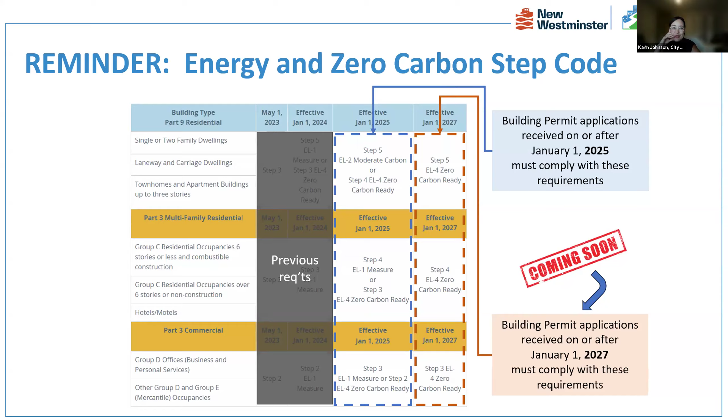If you could move to the next slide, Sue. We wanted to highlight, building off of Jill's presentation, that we are currently, effective as of January 1st, 2025, at Step 5 EL2 or Step 4 EL4 for Part 9, and for Part 3 we are at Step 4 EL1 or Step 3 EL4. But we wanted to remind everybody that as of January 1st, we are moving up to Step 5 EL4 for Part 9 and Step 4 EL4 for Part 3, so everybody should be aware of that timeline and shift happening soon.

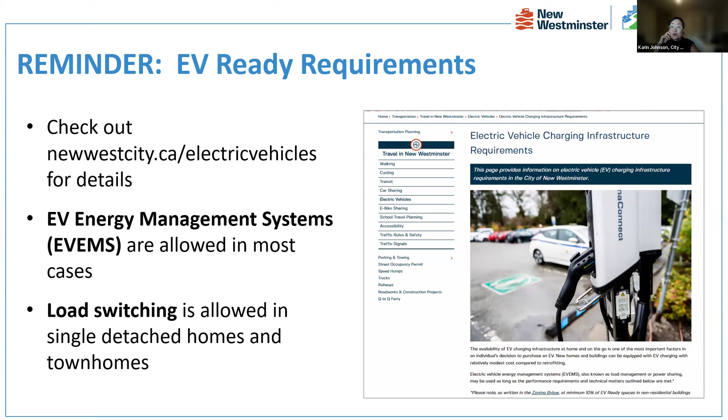Next slide, please. Just a reminder of our EV ready requirements. We've had these in place since 2018 for residential buildings, and as of last year for non-residential. You can find this information on our website. Just a reminder that we do allow, in most cases, EV energy management systems and load switching as well.

And next slide. We also want to remind folks of this new resource, the Climate Ready New Homes Bulletin. This outlines the city's expectations on what we're looking for from applicants to show how they've met the STEP codes and overheating protection requirements. Other solutions can be proposed, but following the guidance in this bulletin usually means a lot less back and forth between you and the city. This bulletin applies to all new BP applications as of February 1st, 2026, so it's helpful to look at it at the beginning of a project and plan adequately, and be aware of what's in it. If you have questions, there's contact information on the bulletin.

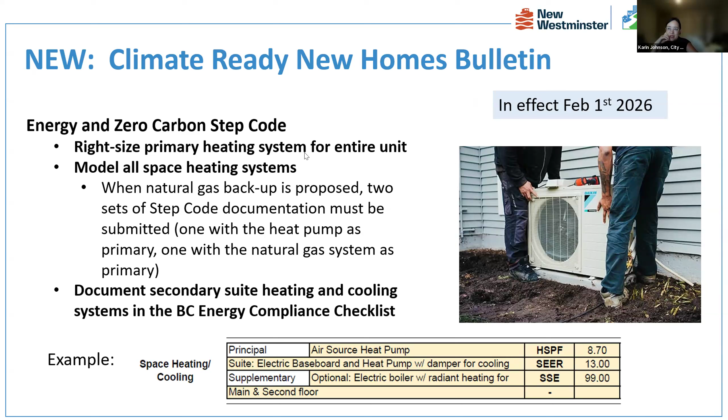Next slide, please. Super quickly, what you'll find in that bulletin is guidance related to the energy and zero carbon step code, including right sizing the primary heating system for the entire unit. We ask to model all space heating systems, so when natural gas backup is proposed, we look for two sets of step code documentation, one with the heat pump as primary and one with natural gas. And we ensure secondary suite heating and cooling systems are documented in the BC Energy compliance checklist.

Next slide, Sue. We also provide guidance on overheating protection, outlining three options. Central cooling for all conditioned airspaces is the simplest option. Option 2 is if only one room has cooling, a heat loss gain report must be submitted for the refuge room. Option 3, if a passive cooling option is selected, a signed and sealed energy simulation report should be submitted, and a Section 219 covenant registered on title. So there are lots of details in there.

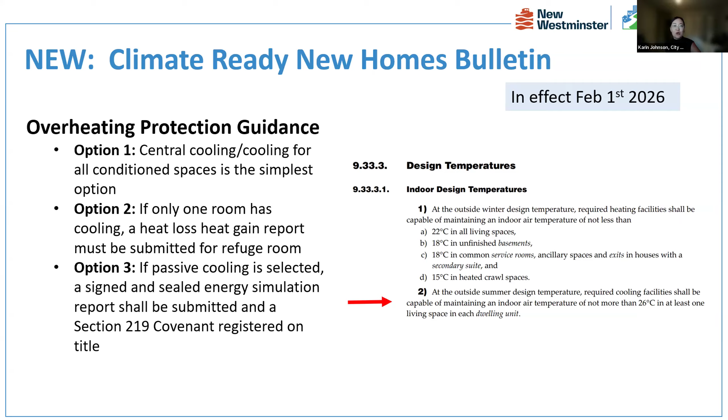You're muted. Oh, I think I'm talking here, right, Sue? Oh, sorry, I was muted. You wanted me to talk? Yeah, please. Okay, can you just go back one slide to Karin's? I just wanted to, because that teases it up.

So when the city issued their Climate Ready New Homes Bulletin, one of the things that they were explicit about was the implementation of requirements for F280-12 compliant load calculations at building permit. That's to demonstrate the sizing of the system and to help with compliance and verification around cooling compliance.

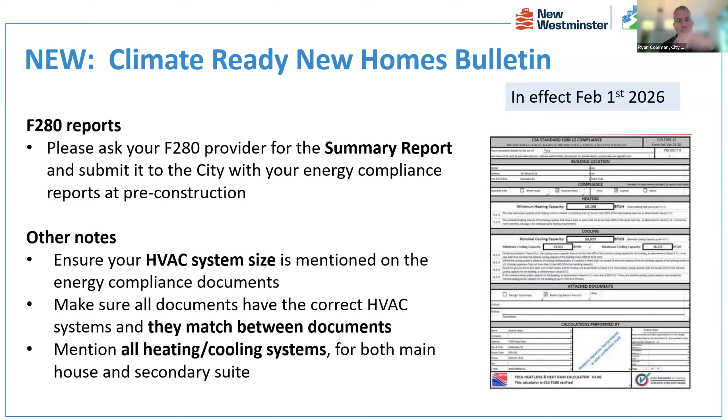Now that the city is requiring that, we're starting to get reports in, and we're helping out with the city in terms of capacity through Energy Save New West, in terms of what they should be looking for with those reports, and then what is some good data that should be on those reports.

Number one, and this is helpful for the industry, is you need to be making sure that your HVAC designer or the trade who's doing your load calculations is using verified software tools. Up until recently, there were various programs claiming to be F280, and there was no way of validating whether they were actually providing outputs that were in line with the standard itself.

So the standard has been updated over the past year to include a clause, which is this one, that says any software that claims to conform must be approved through a verification procedure, and it should have this logo, which is HVAC Designers of Canada Verified F280 Software.

So TECA, the usual. I think do we have a slide here with the... Good. I thought we did. So this is a slide with, as well as Prop Rate is on there as well now.

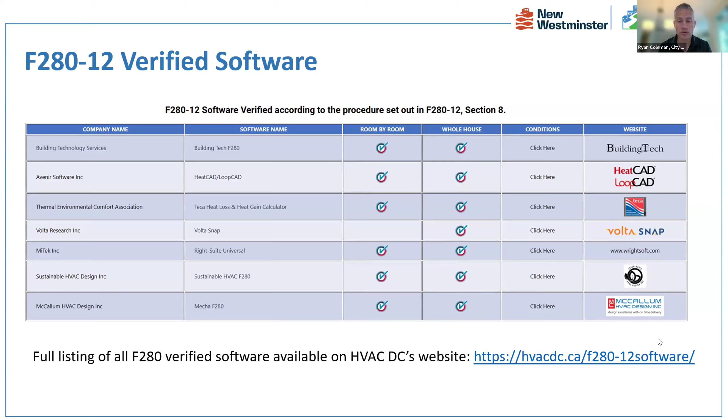So we just need to update the slide, but there are various tools out there that you may be accessing through your contractor or your energy advisor or whoever is going to be doing the load calculations as part of your submittal. It should be one of: Avenir, TECA, which is a very popular one, MiTek, which is Wrightsoft, and then Prop Rate and Volta Snap, which is the energy advisor tool to turn the energy advisor data into a compliant load calculation. But the key thing to keep in mind is it should be one of those software tools, and it will have that verified software logo on it. So that's your one tip for managing this requirement.

Next slide. And then standardized reporting. So all of these software tools have their own proprietary reports and various pie charts and ways to demonstrate room by room load calculations, such as the contribution of infiltration versus walls versus windows, all of that kind of good stuff.

What you need to be well versed on, and this is both with the city in terms of their understanding, as well as with industry, is the need for the standardized reporting component of this. All of those software tools come with the ability to provide a standardized output report. The whole purpose of that is to improve the consistency with compliance and verification, both for rebate programs, but also with AHJs now who are doing enhanced compliance.

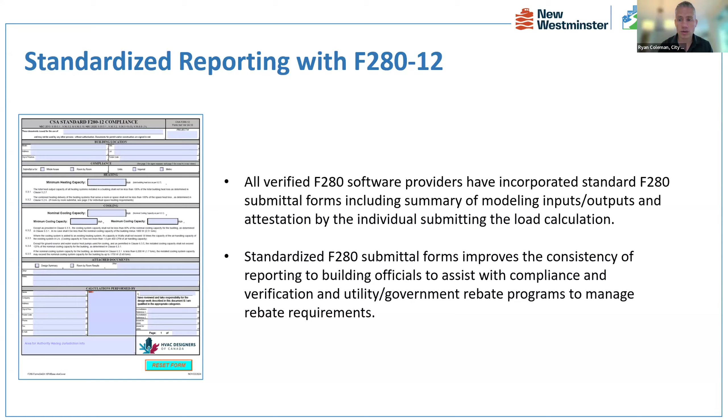Why this is really important is it has 3 parts to it. It has the design heat loss and gain page with the heat loss value, the design cooling value, and then the designer attestation. So that's the system compliance, and who did the calculation.

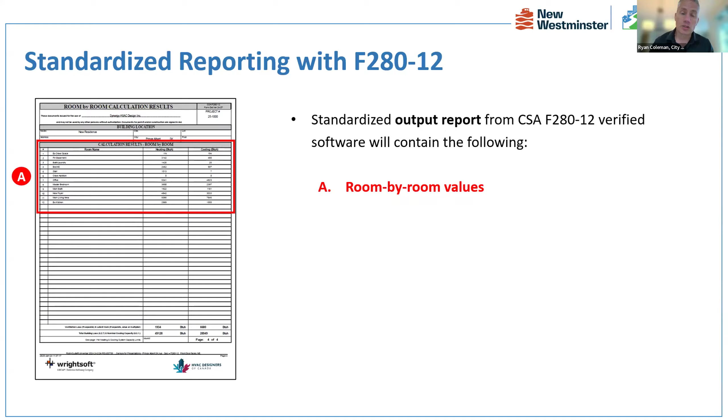It also includes the output report, so that's the whole home stuff. And then it has the output report in terms of the room by room value. This is the breakdown of what the BTUs are for heating and cooling in each of the room areas, which is what you would design to. And then it has the input summary. So you've got your cover, you've got your room by room, and then you've got your input, and these values are like, what were the design conditions.

What are the air tightness values? What is the roof, basement, and wall assembly details? What are the windows? What are the U values? What are the solar heat gain coefficients?

And why this is really important is because those values should mimic what was modeled originally with your energy advisor for BC Energy Step Code compliance reports.

So the first thing that we check is, is there a variation in some of the design condition information or some of the performance attributes that had been modeled for the load calc versus the step code compliance documentation? If so, and it's not within an acceptable tolerance, like we're talking about way different equipment sizes and things, then we need to investigate that further.

But for a builder or a designer, you need to be taking ownership of it and making sure that it is entirely accurate and correct. A little spot checking and auditing can help with that.

So that's why those reports, and it's really 3 pages, and it should be 3 pages, that's what you'll be submitting to the city. You can have the proprietary stuff that the software vendors also produce as backup, but it's going to be the standardized reporting that is going to be reviewed and communicated between the applicant and the city.

So if you have any questions with F280 verified software tools, New Homes Climate Bulletin, we're happy to take those and field them by email or to support with the transition. We're just starting to see some F280s now, so we're kind of learning. We're helping to support with the training and support needed at the city to do this, as well as the industry.

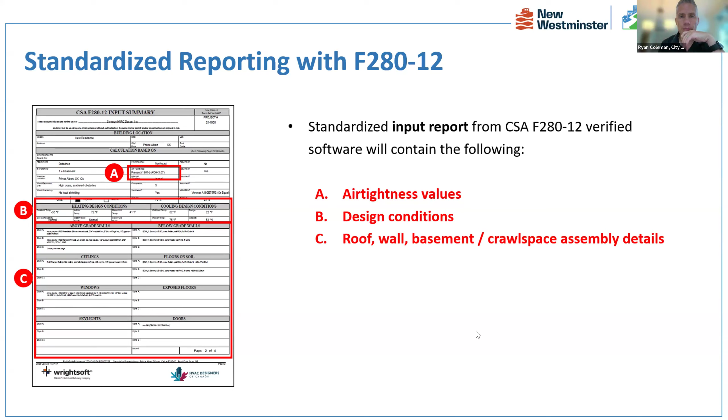Okay, the next item is about the solar panels and battery storage rebate program. At our last fall event, we gave a brief preview of this solar panel and battery storage program. This program officially launched at the beginning of this year, and we've seen strong interest from homeowners, with a significant number of applications received as well.

So these are the program details for new homes. The rebate amount is the same as the existing home, so it's up to $5,000 for solar PV, which is $1,000 per kilowatt. And the battery storage, as of April 1st, the rebate amount has changed to $1,500, so it's $500 per kilowatt, and the maximum amount will be $1,500. The battery storage must be paired with a solar PV system, whether it's existing or new.

And you have to apply for net metering connection, and the product must be on the eligible system or product list. You can refer to the BC Hydro eligible product list. For the rebate eligibility, the home must be structurally complete with installed and connected plumbing, heating, electrical, water, and sewer services. And as of June 1st, the system must be installed by a home performance contractor network member to qualify for the rebate.

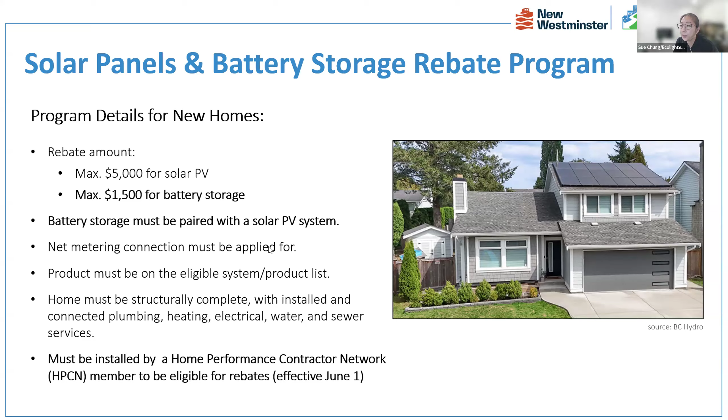Okay, the last one, we also teased out that we will be updating the technical bulletins for Energy Step Code, as well as there will be a new Zero Carbon Step Code technical bulletin coming up. So we now have a timeline, and they will be issued this summer, so keep an eye on it. These updates will provide clarified requirements, improved consistency in interpretation, and additional technical guidance to support implementations.

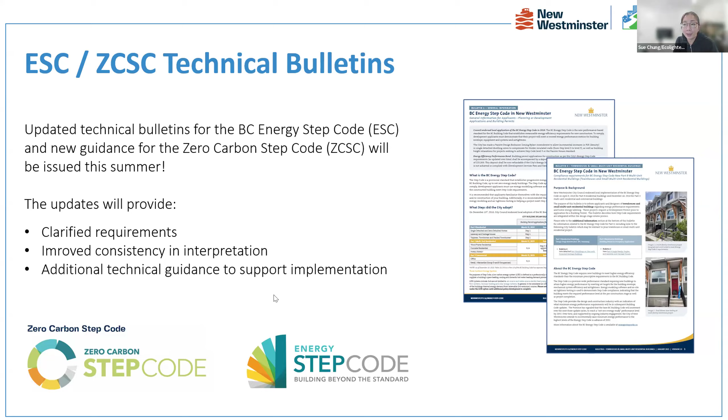I think that is the last slide of the City and Energy Save New West updates.

Anyone has any questions, comments, or thoughts, or suggestions of things they might want to see in the fall? All good? Going once? Going twice? Okay, no worries. We don't have to if there's no further comments or questions, we can wrap up here at 10 a.m. So thanks everyone for joining us.